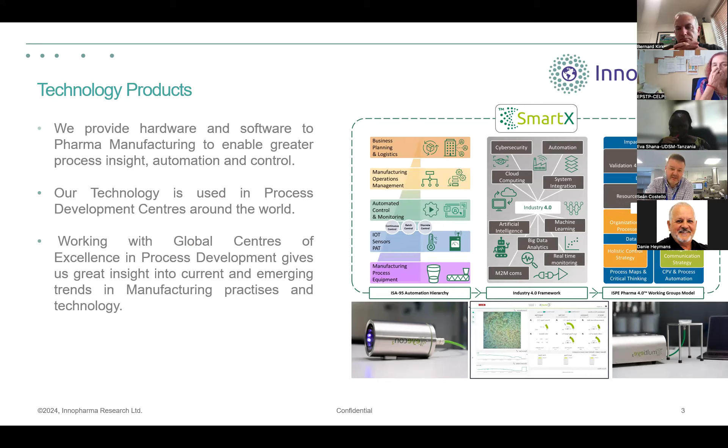So these are just some images of some of the hardware and technology that we use. This one here, for example, looks right into a process. It's actually looking into a window where powders are being fluidized.

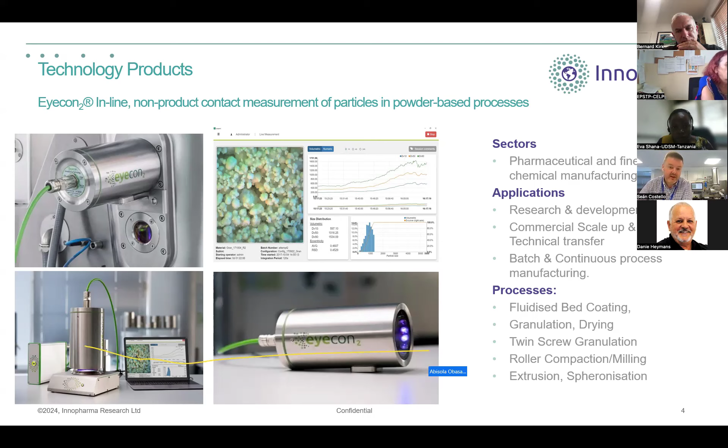It's measuring the size and shape of them during the course of the process, where the pharmaceutical company is trying to granulate a powder to a desired particle size range or distribution. So that actually is a robot, because it's an imaging device. It has a light source that needs to be controlled. It has a focus mechanism that's actuated that needs to be controlled. And it has a camera that's taking images. And those images need to be controlled in terms of syncing with the light source, and in terms of those images being analyzed and to do something useful with that data.

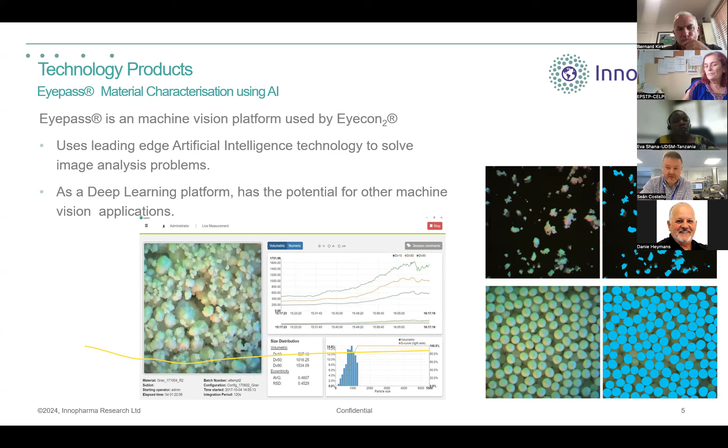So here's just some of the image analysis screenshots that we do with respect to that. So very much AI driven, very much using best of breed type of algorithms, like convolutional neural networks, etc., if you're familiar with that type of technology. And here I'm just showing what we do at a higher level, holistically on the factory floor, where we gather data and we move it around for different purposes. So whether it's automation or control or data storage, to provide business insights, etc.

And that data flows up with your ground level control. And then you have your supervision control, which involves human machine interfaces. It involves programmable logic controllers. It involves supervisory control systems and distributed control systems. And then above that, again, you have enterprise level systems that manage the data around that. So manufacturing execution systems, laboratory management systems that manage test data and sample data on a product, you have manufacturing operation systems and other business insight dashboards.

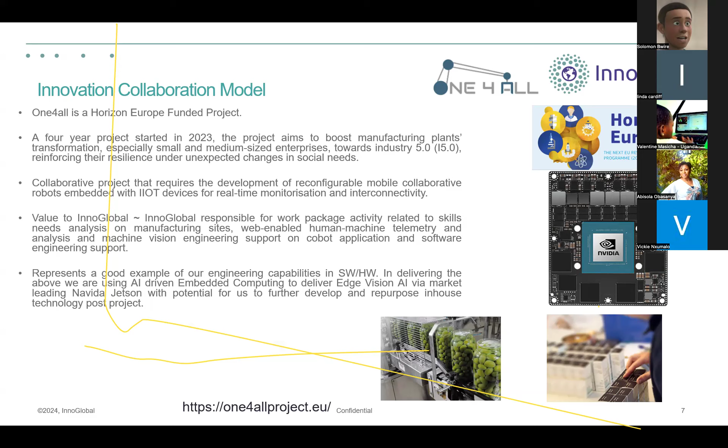Some of the stuff we do on the training side would be applicable with respect to Africa. We run a program called Digiskills Africa. We tend to invite applicants who are from degree to PhD level in science and engineering backgrounds. And basically, we give them a 6-month, very applied, industry-focused program of learning, helping them bridge their knowledge from what they learn in academia to how that's applied on the factory floor and industry in med devices, in pharmaceuticals, in food technology.

And it involves a face-to-face workshop as well, which the last 2 occasions we've run in Cape Town. This year we had about 70 students participating in it. So you can learn more about that on our website as well.

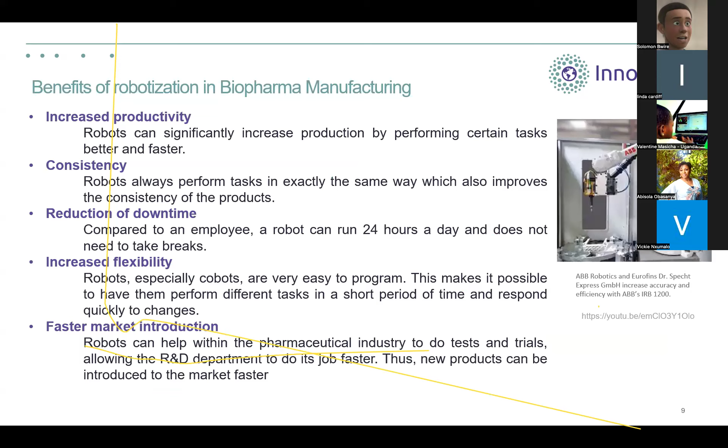I'll keep going now in terms of more about robots on the factory floor and pharma. So this slide needs no introduction, I would say, in terms of the benefits of what robotization can deliver on a factory floor. So I won't dwell on it, but it does feel like I need to cover it. Examples of what I would see: pretty much most stainless steel process equipment in a pharmaceutical company will have some degree of automation from a robotic point of view. So here's an example of what we call a bioreactor.

And it's used to create a sterile environment in which cells can be grown. Usually those cells are producing a protein, and that protein might have a medicinal effect. It might be an antibody, it might be something else that we're looking at for vaccine production or something like that.

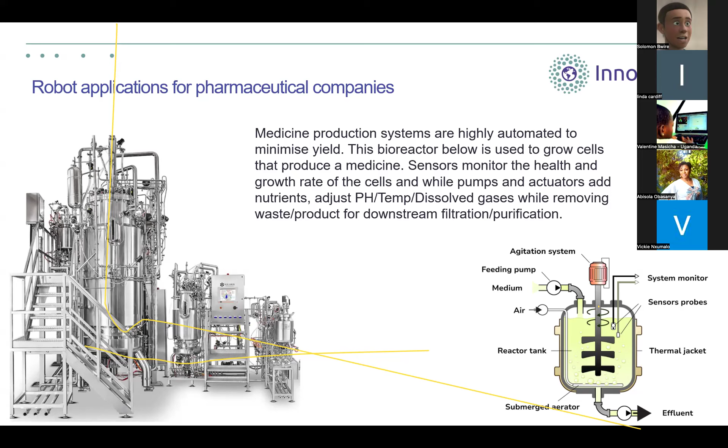And so to grow those cells, one needs to manage the environment in which they grow. You need to prevent contamination. You need to make sure they have enough food. You need to make sure that the waste that the cells are producing as they respire doesn't become a contaminant, etc. So it's a good example of a very highly automated life support system that we would use from that point of view. And equally, in traditional pharmaceuticals, we would have chemical reactors that would do something similar.

Another common example here is where we would use pick and place type robots, simply for moving product around, particularly from the packaging point of view, and that's quite common from a mass production point of view. And the advantages there for us, beyond other types of manufacturing, is that we can do it with a product that might have very high potency. And so you don't really want human workers coming in contact, for their own safety, or indeed the product itself. You don't want that getting contaminated.

So you remove or minimize the interaction of humans with the product, because typically the greatest source of contamination in a pharmaceutical plant is via workers. So you try and minimize that.

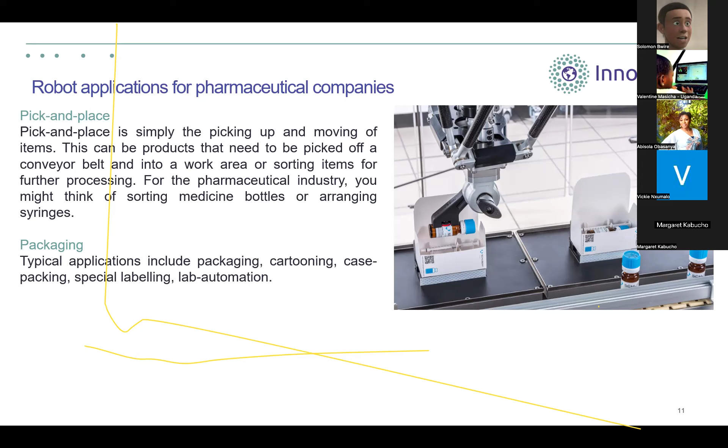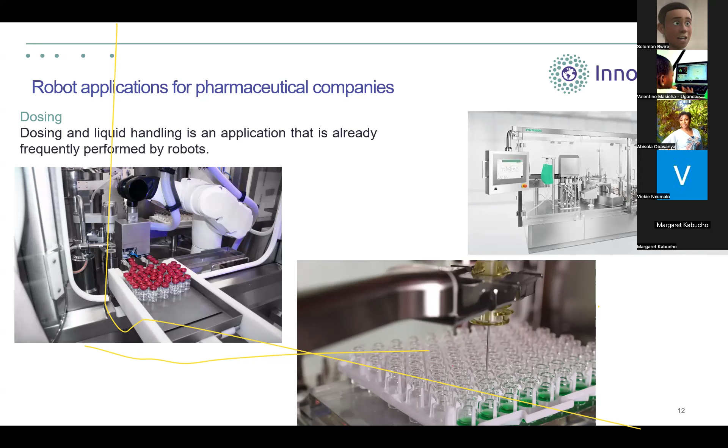Another key example of where we get a lot of advantage from robots is from the point of view of dosing and liquid handling. So you can really manage minute quantities with robots, and equally do it in a scalable, mass-produced manner. So a lot of equipment is focused on that.

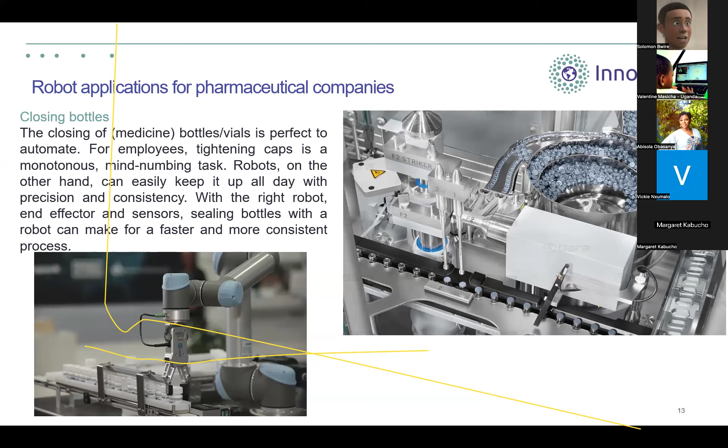Even tasks around closing bottles, and again, from a sterility point of view, closing vials, and from a mass production point of view, being able to do that and scale up in a way that drives quality into an operation. So a lot around that aspect.

And increasingly, especially with machine vision systems and more sophisticated artificial intelligence driving vision detection systems, we would look at product inspection. Here I look at a big area where we have vials that would contain sterile drug product, and there are so many different types of packaging involved in that. And even within individual packaging, there are so many different quality attributes that one needs to check to ensure that they are correct, and to ensure that there are no impurities that literally could be fatal.

So the big drivers in pharmaceutical manufacturing are efficacy of the medicine you're making. By efficacy, I mean that it actually works as intended. Safety of your product, that there are no unintended consequences from the use of your product. And it goes without saying, quality as well is a big part of that. So safety, efficacy, and quality are really three considerations that help drive automation in the industry.

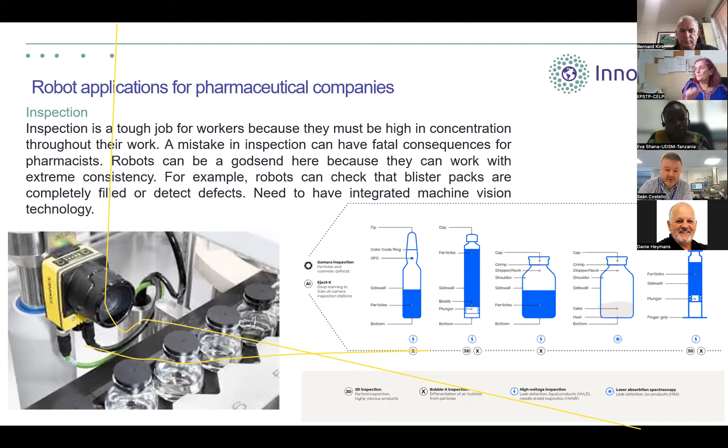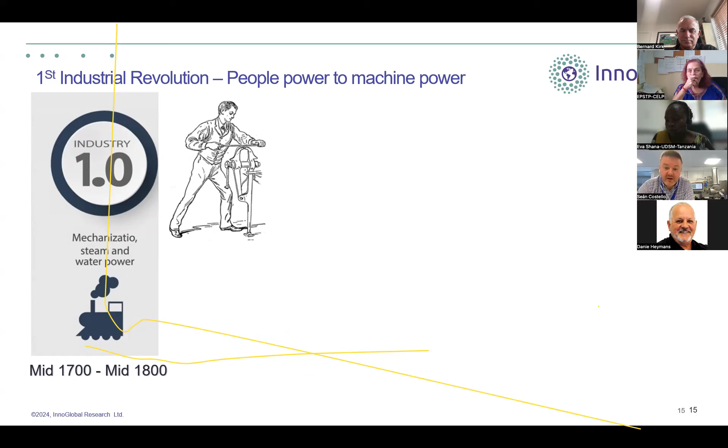And in the developed world, we tend to think of the Industrial Revolution in Britain, and the mass production in cotton mills in cities that sprang up as populations moved from countryside to cities. And what's interesting around that period is the social, economic, political drivers around that. Why did it happen in Britain? Why didn't it happen in France or Italy or other places?

But of course, what happened then over time is that these new technologies became cheaper. And so it suddenly became affordable for other countries to take on some of those industrialized kind of technologies. And so you had a leveling up in the likes of the Italys and the Frances that I talk about that began to happen after about 100 years.

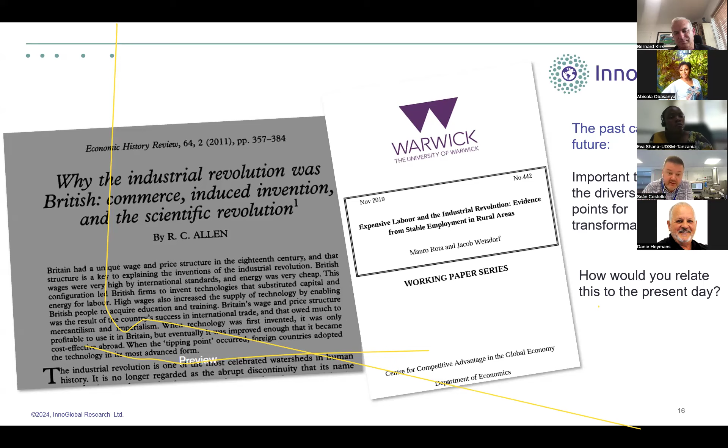An example of that would be, you look what's going on in India, you look what's going on in parts of Africa, where nobody's going to bring telephone lines now to every single village and every single house. They're not going to bring fiber to every single village or every single house. They're going to just put in mobile technology like 4G, 5G. And so they're going to skip the steps and catch up. And history shows that the precedent is there. So I just wanted to bring one's attention to some of that, because those arguments are as relevant today as they were back then.

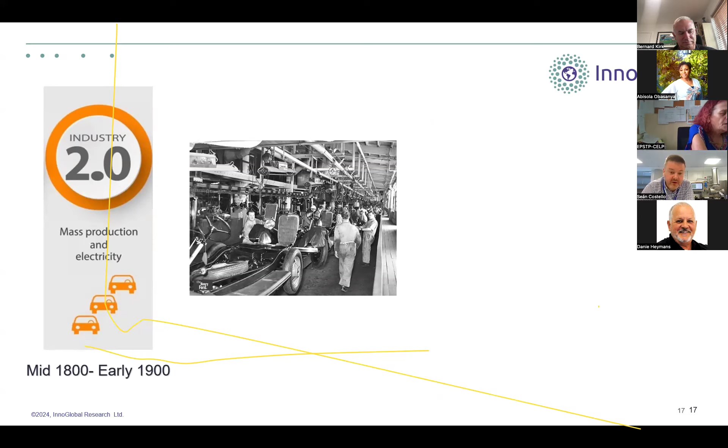Moving on to Industry 2.0, that's very much seen around the mid 1800s onwards, where having had steam, people actually start looking at how to start automating, and electricity comes in as well. And you have an example there, the photo, the famous Henry Ford assembly lines. So I won't particularly dwell on that. And that went on until you began to have the post-World War II scenario of transistors, etc., which brought a more sophisticated degree of automation and mass production.

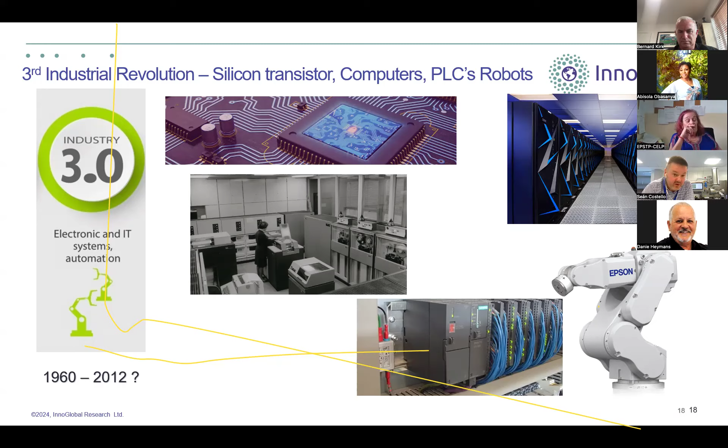Very good. We've had people starting talking about Industry 4.0. The first publications you see on that would be around 2008, 2009, really out of Germany and the automation industry there, the automotive industry there. And no matter where you look, people have settled on defining Industry 4 around 9 industry pillars. And I have them listed there. And it's interesting that over the last 15 years, those 9 pillars have stood the test of time. And also, they're at a high enough level that some technologies have come along that underpin what's taking place there.

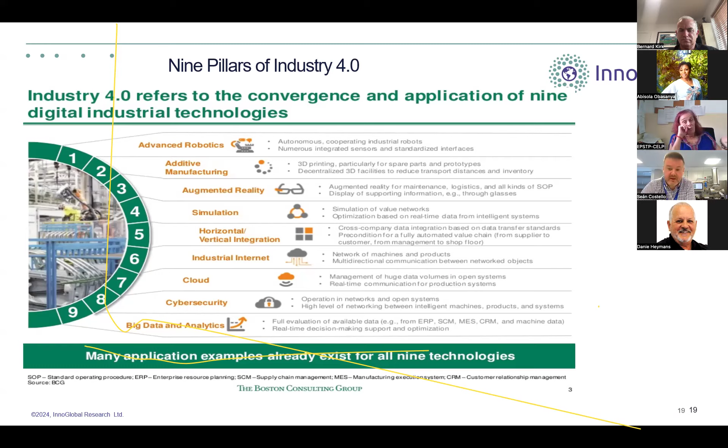So, for example, artificial intelligence isn't listed as one of the key enabling technologies or pillars in Industry 4.0, but it is there supporting what's driving cloud adoption, what's driving big data and analytics, what's driving advanced robotics and simulation. So my point is that there's sub technologies behind these 9 pillars that are driving their relevance. So that's where Industry 4 is today, and people still see us as being in an Industry 4 type space, and they try and break it down in terms of different stages.

So we see definitions, on the factory floor at least, of what we mean by digitization and transformation. Digitization is literally going from analog to digital. Whereas digitalization is actually doing something useful with that digitized data. And transformation is actually changing how you do your business as a consequence of all of that. So useful to be familiar with that.

And people talk about the processes of adopting Industry 4.0 in their businesses. For a lot of businesses out there, they're still very much at the early stages in terms of digitalization and connectivity, and then actually doing something with that data from an analytics and visibility point of view. And as you progress, you get a higher order value out of the digital transformation process: being able to see your data, understand that data, use that to predict your business, and then optimize and adapt your business on the back of those predictions. So that's seen as the ultimate journey.

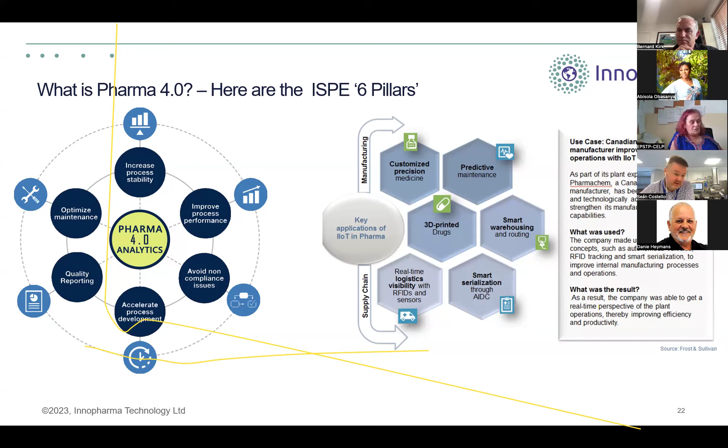So again, all of those benefits drive product safety, product efficacy, product quality, and certainly we're seeing the impact of that in how we manufacture today. And there is a professional society, the International Society for Pharmaceutical Engineering, and they have developed an operating model around this Pharma 4.0, whereby they recognize that it's not all about technology and putting in gadgets. This is about transforming your business, and about every aspect of your business working together.

So there's a big part around workforce and communication and culture, because it's natural for everybody to resist change. We all have our comfort zone. So if you want to change your business, you need to bring everybody along. Otherwise, change and digital transformation will fail, cracks will appear. So you do need to take a holistic approach.

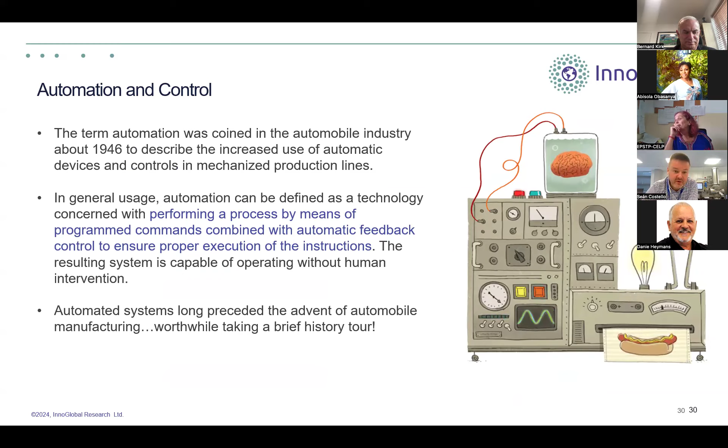But yeah, automation control has been around in the modern sense of the word since post-World War II. We've covered advantages that I think you're familiar with as well. There are some restrictions or limitations that we need to think about, though, in terms of why it's not for everybody. There are high initial costs. There are huge consequences if something goes wrong from an automation point of view. Very quickly, you can have a very expensive volume of product that's defective.

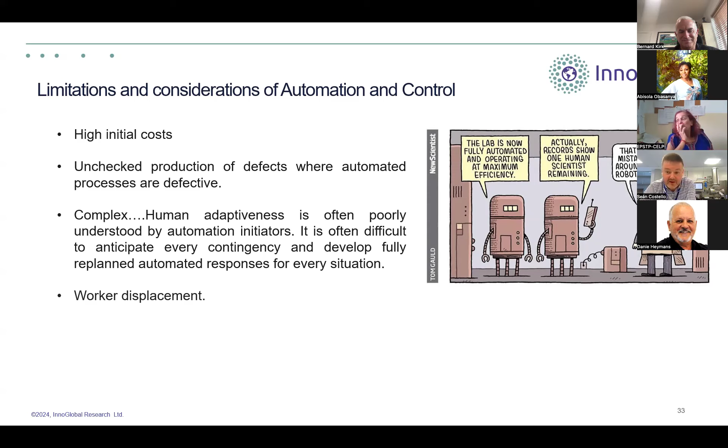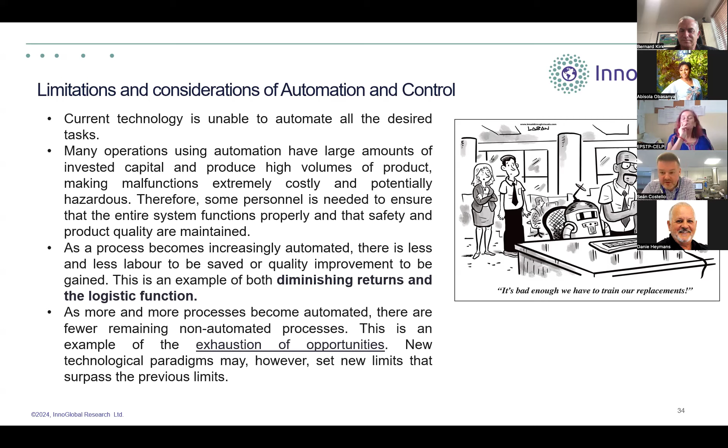And equally, it's not easy to replicate every single process that a human drives. Our brains are actually wonderful and unique and not easy to replicate. And I mentioned the whole worker displacement and polarization as well. So from that point of view, the more you automate, you pick off the low-hanging fruit, and the harder or more expensive it becomes to gain more efficiencies. So very often factories make a choice as to what degree of digitalization, automation or robotization they adopt. And they're happy with that, because to go any further may not make economic or technological sense.

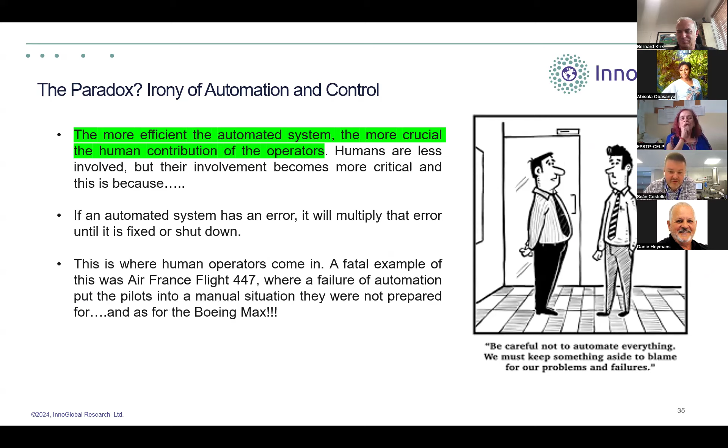And the other element is the so-called paradox or irony of automation: the more automated you become, the more crucial the human in the middle of it all becomes. So a lot going on there in terms of societal impact, worker displacement, worker polarization, and this fear that I'm going to lose my job to a robot. I would counter that by saying, historically, if you look at the step changes of Industry 1.0, 2.0, 3.0, 4.0, there was always a fear in the writing of the time about worker displacement and people losing their jobs.

But actually, what tends to happen is an economy becomes more productive. And because it becomes more productive, there's more money in the system. People's standard of living increases. Opportunities for education increase. Opportunities for new forms of employment increase. So I would counter that in the years ahead with Industry 4.0, 5.0, automation is an economic necessity and a societal opportunity in terms of new jobs, extra jobs, careers that have not been invented, etc. But the onus is on us as a society to bring everybody along on that journey.

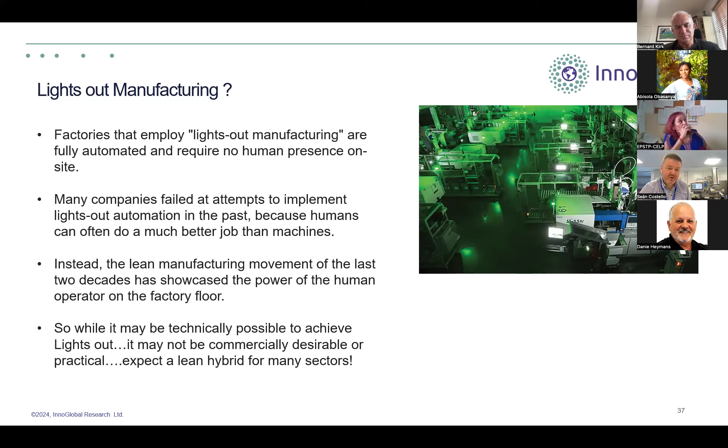One term that's thrown around as well is lights out manufacturing: the idea that you become 100% fully automated and literally you can turn the lights out in the factory because there's nobody inside working. An example might be data centers, where you can get to that level, and almost the semiconductor industry. But by and large, because of the paradox of automation and other things I've spoken about, it's usually not technically or economically feasible to go 100% all the way. So that's a good thing. The more you use robots, the more important people are.

Yes, we have a hand up there, Danie, if you want to jump in. Sorry, no, keep going. I was just applauding the fact because there's so much information. I'm also having a look at your website, so definitely some work for me to do afterwards. But love the spread, so just keep going. Thanks, sure, no problem. And I'm hoping if I endear myself enough to Bernard on this call, he might have me back sometime. You never know.

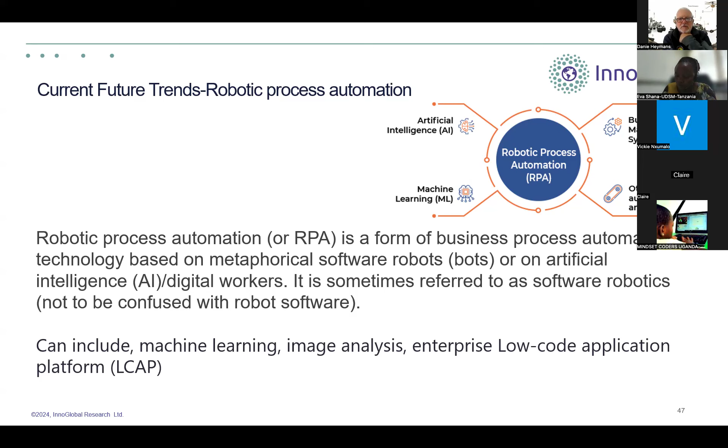And of course, building those up can be driven by low code, no code type applications. Microsoft Power Apps would be an example of that, where it all of a sudden democratizes a lot of this, where you don't necessarily have to have a programming capability to do some very powerful stuff.

And hyper automation is another turn of phrase with respect to RPA that's coming into vogue a bit. One of the things that I look at to keep track of this is Gartner's top strategic trends. They publish them every year. You get YouTube videos, everything like that, and you actually become familiar with Gartner. They like to come up with a lexicon of trendy technology words.

So you keep an eye on what they're coming up with, and you find that those words manifest in your language in 3 or 4 years' time. They would have come up with cloud computing, for example, back in the day. I hope we don't run out of time, Bernard, but I feel I can't leave today without talking about AI.

It is manifest in all of our lives, and I guess the challenge with it is the dangers of it. Dangers of it in terms of how you train AI. You train it using data, and as a scientist, I would say all data is biased. You need to accept that. You just need to understand where that bias sits. So I'm just going to give some metrics here.